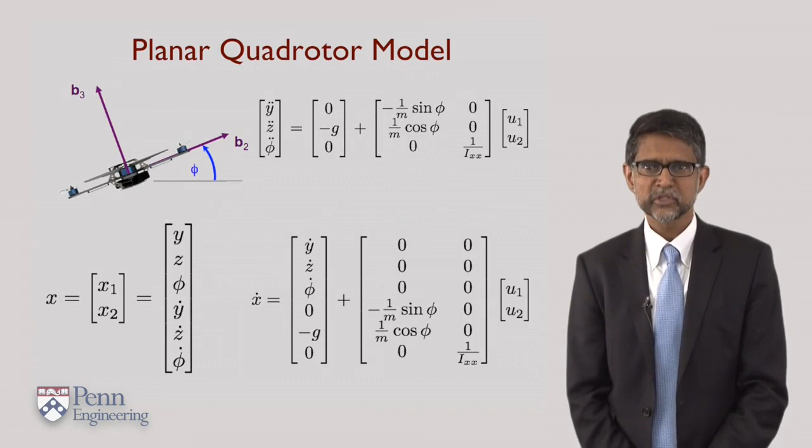Now that we understand how to write the equations of motion for a quadrotor, let's turn our attention to the model for a planar quadrotor. The equations of motion that you saw earlier have now been rewritten in the form that you see here. At the bottom, you see the state space description of the quadrotor, the 6x1 vector, and the bottom right, you see the derivative of a state vector.

The first three elements of this derivative consist of velocities. The bottom three elements consist of accelerations. This is just a compact way of writing the equations of motion. On the right-hand side, you will see two inputs, u1 and u2. This vector is the input that can drive our dynamical system. By specifying appropriate u1 and u2, we can change the state of the quadrotor and get it to go where we want it to go.

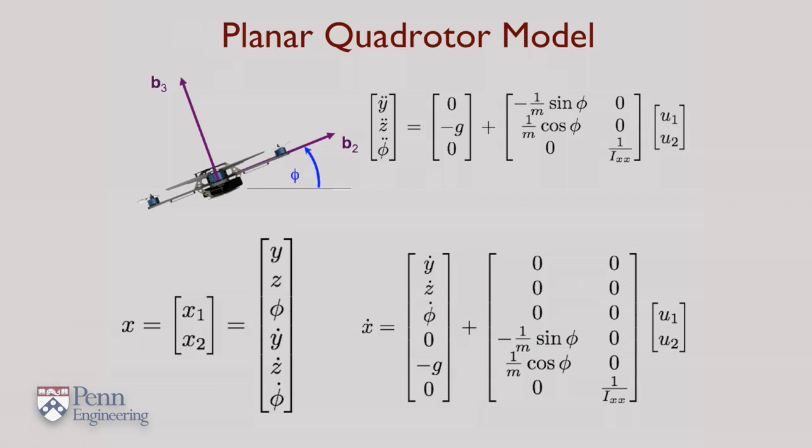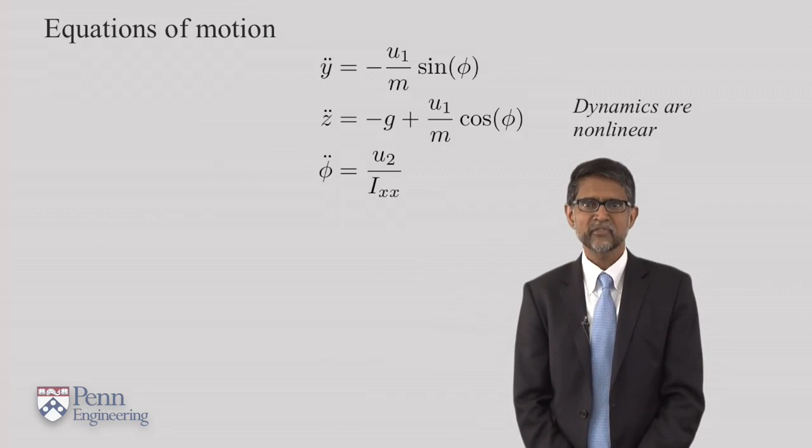If you look at the equations of motion, you will notice that they're nonlinear. The nonlinearity here comes only from the fact that we have the sine of phi and cosine of phi. Let's consider these equations of motion at a hover configuration. We define a hover configuration at y equal to 0, z equal to 0, and phi equal to 0. The hover configuration can be at equilibrium only if the thrust vector u1 opposes the gravity vector.

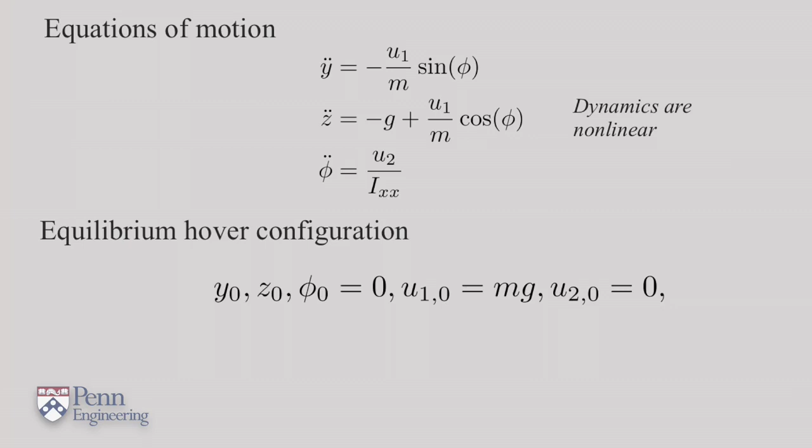So at hover, the nominal value for the input u1 must equal mg. Further, the nominal value of u2 must be equal to 0. If it were not, then the vehicle would try to accelerate. Next, we'll pursue a linearization of this nonlinear model. We'll call this the linearized dynamic model.

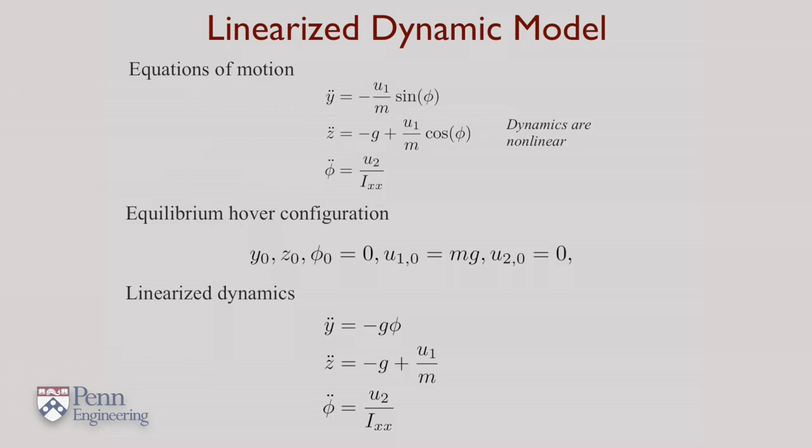We do this by recognizing that sine of phi and cosine of phi are the two principal sources of nonlinearity, and we ask how these nonlinear functions behave in close proximity to the hover configuration. So when phi is close to 0, sine phi behaves roughly like phi, and cosine phi is roughly constant. If you replace sine phi by phi and cosine phi by 1, you get the linearized equations that you see below. Let's now look at the control problem.

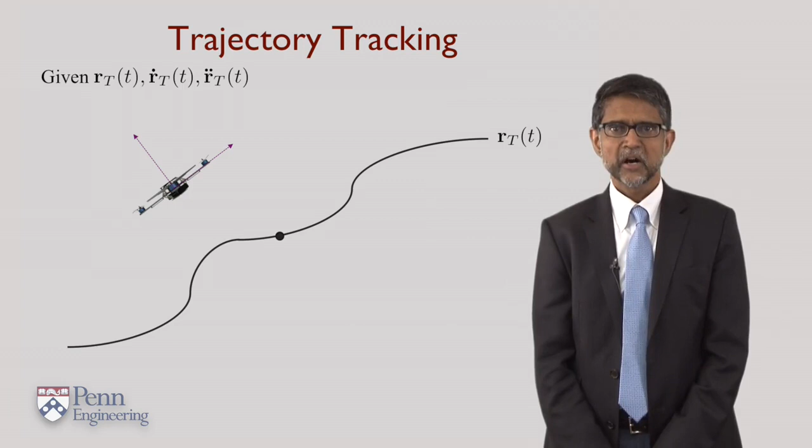Imagine a planar quadrotor trying to follow a specified trajectory r sub t. R sub t denotes a position vector. The fact that it's changing in time is denoted by the function r sub t as a function of t on the top right. Of course, this means that y and z are both changing as functions of time. Let's also assume that this function is differentiable. We can calculate the velocity and differentiate it again to calculate the acceleration.

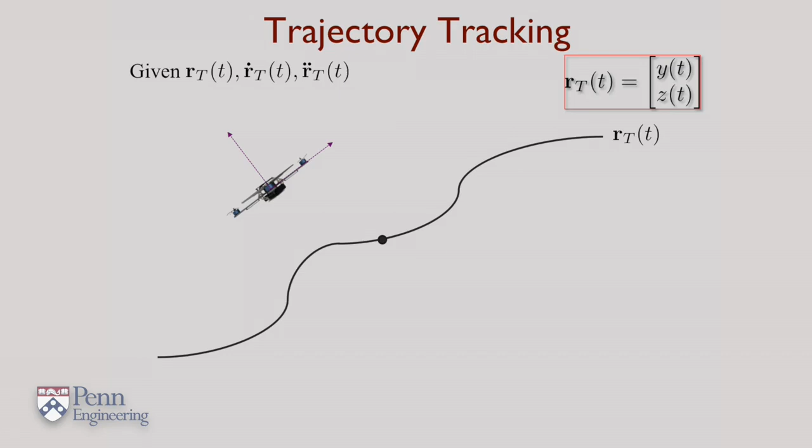We're interested in taking this vector r desired minus r and reducing it to 0, r desired being the point on the trajectory that we want to follow, and r being the current point. Let's define the error vector as r desired minus r, r desired being the same as r sub t. The velocity error is given by the derivative of the position error. And what we really want is for this error to decay exponentially to 0.

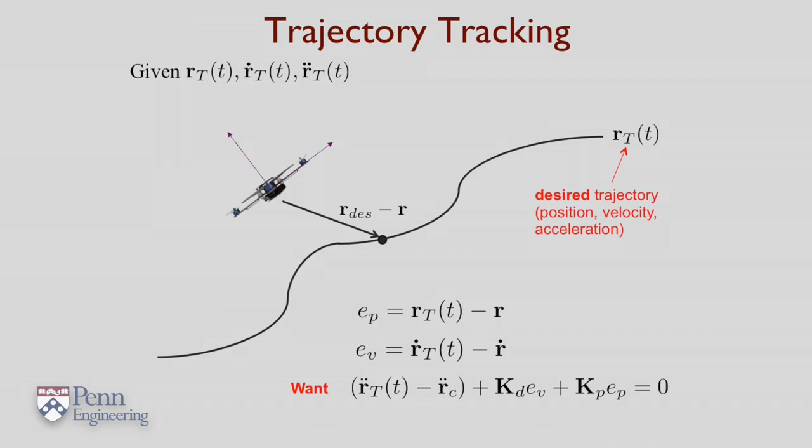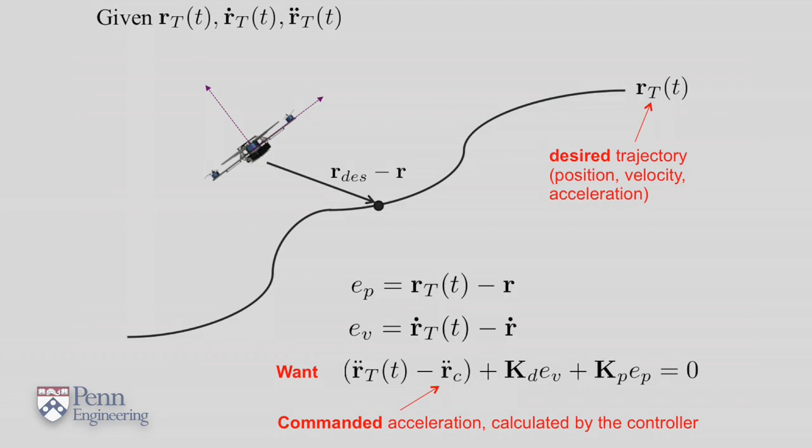As we've seen before, if you take the error term and make it obey a second-order linear differential equation with positive coefficients, you're guaranteed that the error goes exponentially to 0. So we command an acceleration which forces this error term to obey the second-order differential equation that you see at the bottom. This idea can be extended to develop a control structure that's hierarchical.

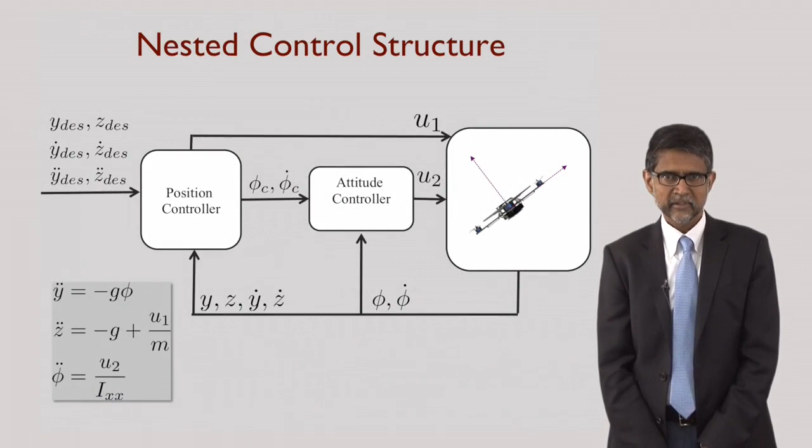Before you look at the block diagram in its entirety, I want you to focus on this inner loop, which is the attitude controller. Imagine you're just trying to control the attitude of the robot. In other words, you're trying to control this roll angle phi to have it follow a specified trajectory. What that means is you want to synthesize u2 such that phi goes to some desired value. That desired value is shown as the reference input phi sub c.

Of course, as before, we assume that phi sub c is differentiable, so you can calculate the derivative of phi sub c, and likewise you can calculate the derivative of phi. On the bottom left, you see the equations of motion. If you look at the last equation, you can essentially get the relationship between u sub 2 and phi double dot. This is a linear second-order differential equation in one variable, and it's not too hard to determine u sub 2 so that phi converges to phi sub c. Let's assume we can do that and go to the next subproblem.

Focus on the equation on the top left. We want to follow a specified trajectory. Let's focus on y desired, the y component of that trajectory. If I set the roll angle phi to be given by y double dot divided by g with a negative sign, that essentially ensures that my roll angle will track the desired acceleration in the y direction. So in summary, the inner loop is designed so that phi converges to phi sub c, and phi sub c is obtained from the y component of the desired trajectory.

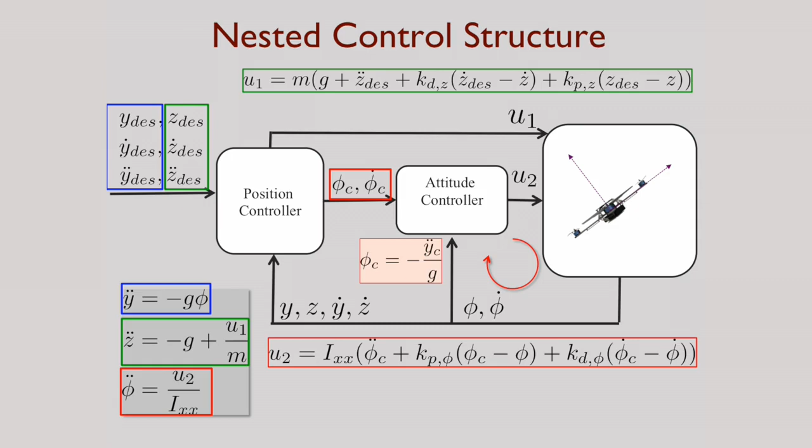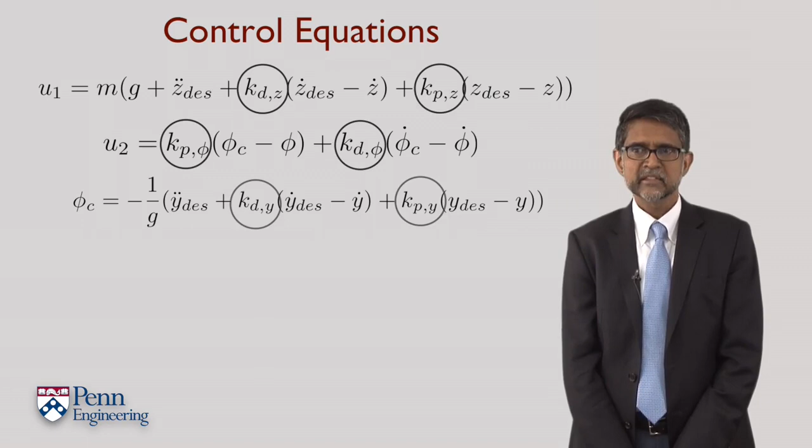If I put everything together, I have actually three equations, one that tells me what phi sub c is at the bottom. From that I get u sub 2, and then I get u sub 1 from that. So these are the three control equations I can use to drive a quadrotor, assuming that it's close to the operating point, and assuming that it stays on the yz plane. The only thing left to do is to calculate the constants. These are the gains, and there's actually 6 of these that need to be calculated.